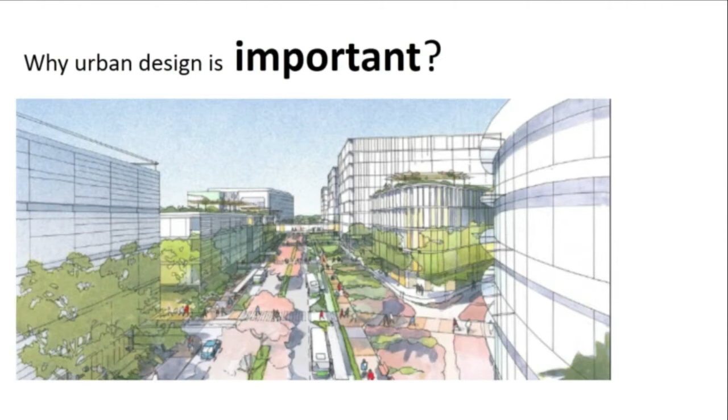Urban design addresses how people perceive and use their environment. It is all about how people care about the look, feel, and livability of their communities. It talks about the imageability of our neighborhoods.

So what are the elements we are looking for when doing urban planning or urban design? It comprises zoning, housing, public buildings, and recreation zones, whether it's parks, playgrounds, etc., along with different types of road systems and transport facilities covering all modes of transport.

How are we going to read the urban neighborhood? There are four methodologies of reading an urban neighborhood. Any study area, any urban neighborhood, can be read with all these four parameters.

First you have to identify. Identify what? Identify your urban neighborhood's name. It starts with the name, so you have to check for the name, because that particular name has been given to that particular neighborhood for a reason. It has some history, some origin, some valuable insight to it. You are looking for that.

Then you have to see the place of your neighborhood, the topographical pattern or the geographical connections it has. And you are looking for the significance - political significance, architectural significance, or socio-economic significance. For example, if you take up Chennai, during the British period Chennai became famous for the Indo-Saracenic architecture.

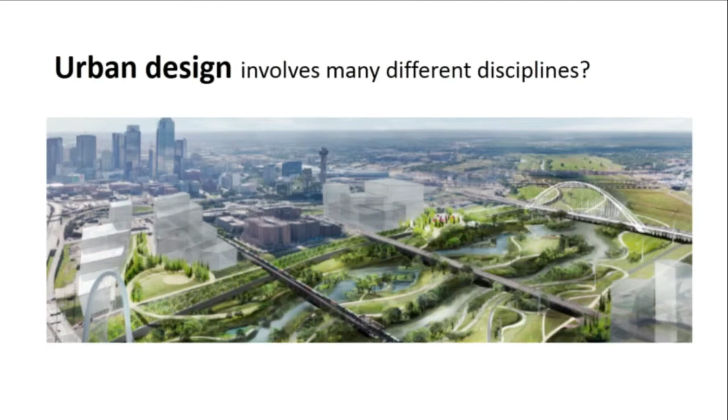Urban design operates at three different scales: at the regional level, at the neighborhood level, and at the block level. So from the larger scale to the smaller one. Further, urban design includes infrastructure, architecture, and public spaces.

So reading the urban environment from the urban perspective, there are so many theories, so many ways of reading the urban environment. Here I am going to quote two examples. The first one is about Jan Gehl. He is a Danish architect and urban designer who is a consultant in Copenhagen.

He is focused on improving the quality of urban life by reorienting city design towards the pedestrian and the cyclist. He is a founder of Gehl Architects, and he sees streets in a three-point perspective. He says that every street has three activities: necessary activity, optional activity, and social activities.

If you take a commercial street, say in Chennai or wherever, all the shops in the street, the activity happening in the shops, are necessary activities. The optional activities are the street hawkers or any additional activities on the streets. That becomes an optional activity.

Social activities are things that happen like when some festivals are happening, all of a sudden so many street stalls come up here and there. Or some political meetings suddenly create spaces. These types of activities are considered social activities. So from Gehl's perspective, we need to classify the streets with these three types of activities: necessary, optional, and social.

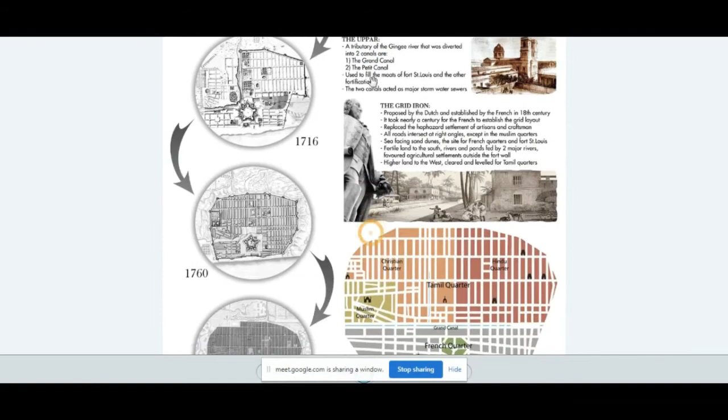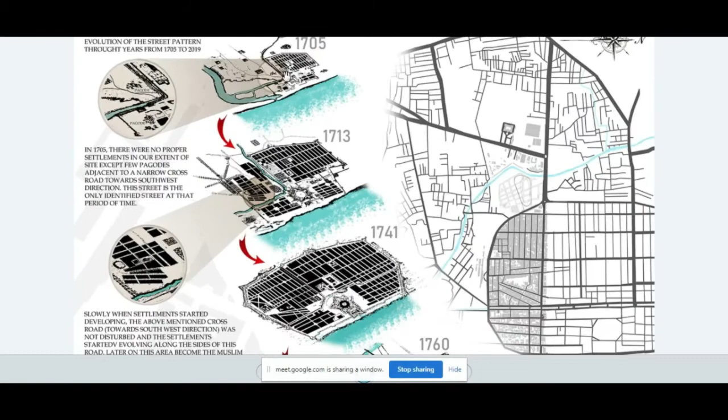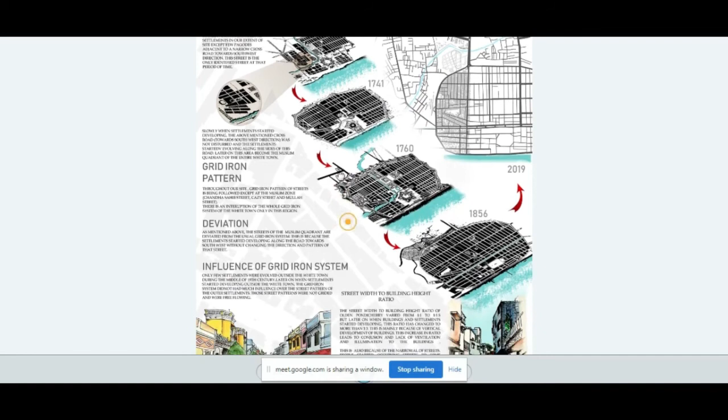We got a map from 1705. We have a canal, a large wide canal in 1705, and in 1713, due to rapid development, it gets reduced. Further in 1740 it is almost vanished, and we have a fort in 1741. In 1760 the canal is formed again, and in 1856 the fort gets demolished. These street analyses help you understand how the neighborhood developed over its timeline.

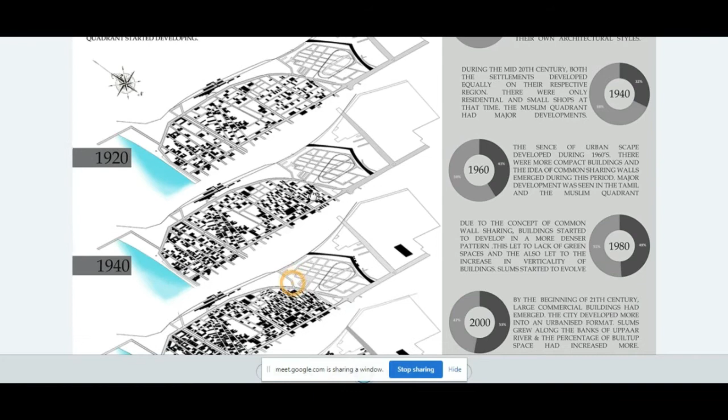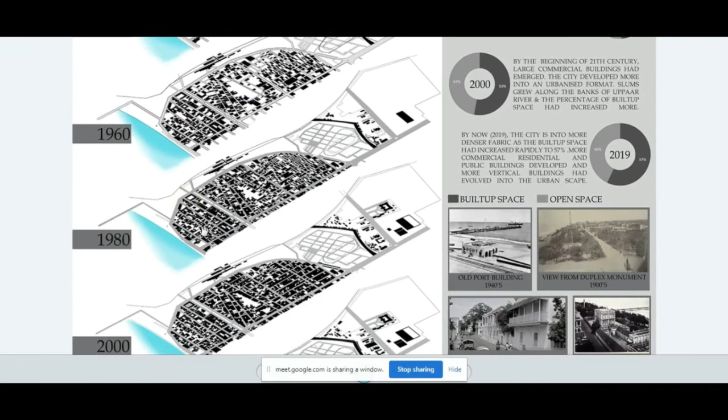The evolution of built forms - earlier we saw the evolution of networks, and here it is about the evolution of built form, how the buildings are developed. We got a map from 1920, and for every 20 years we have taken data - 1920, 1940, 1960, 2000, and by 2019 it is almost finished, with no spaces for further development.

This figure ground map analysis will help us easily understand the density within the neighborhood. For example, in the French town, you can see more open spaces. It is well placed, following World Health Organization norms, with more open spaces. Whereas in the Tamil town, you can see very less open spaces compared to the third ward above, with only a few open spaces. So it starts from sparse fabric to dense and very dense fabric. Figure ground helps to analyze the fabrics.

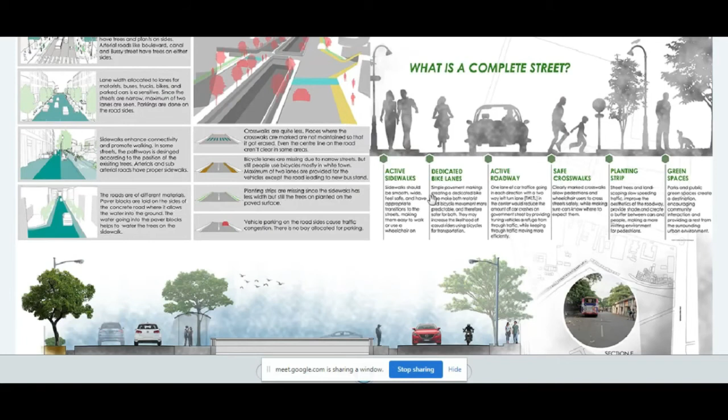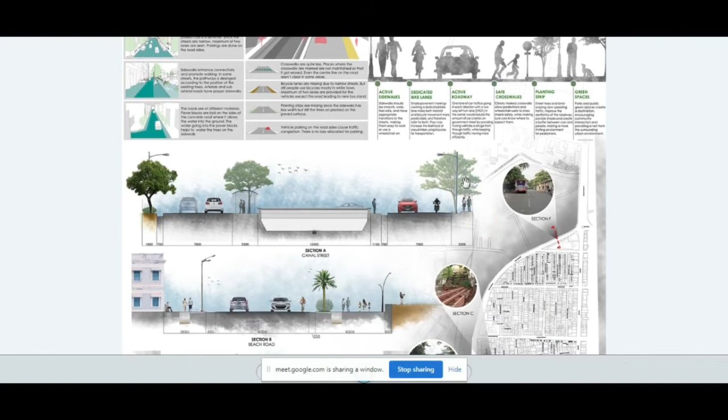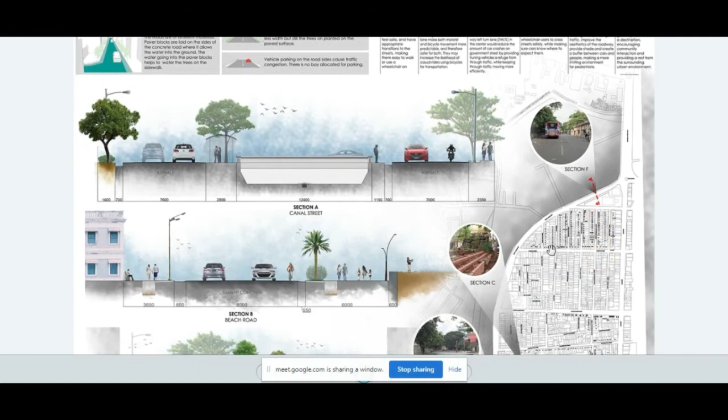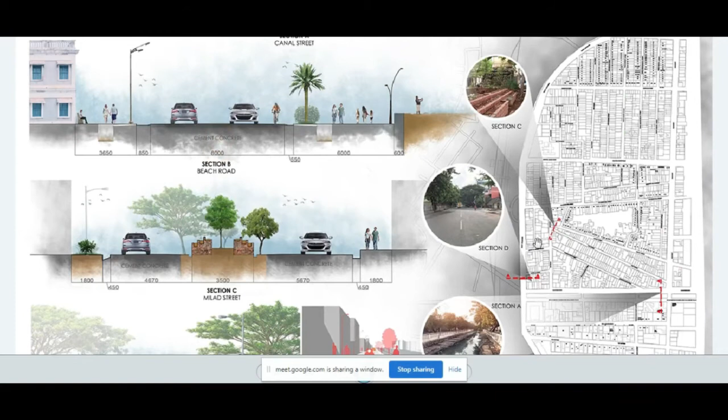Next, about the street sections. We discuss the active sidewalks and activities happening on them, whether sidewalks are given for particular streets or not, the dedicated bike lanes, the roadways, the crosswalks, and the plantings, as well as the green spaces. Each section has been taken, and the typical street section has been elaborated in detail. So this is how the street section is worked out.

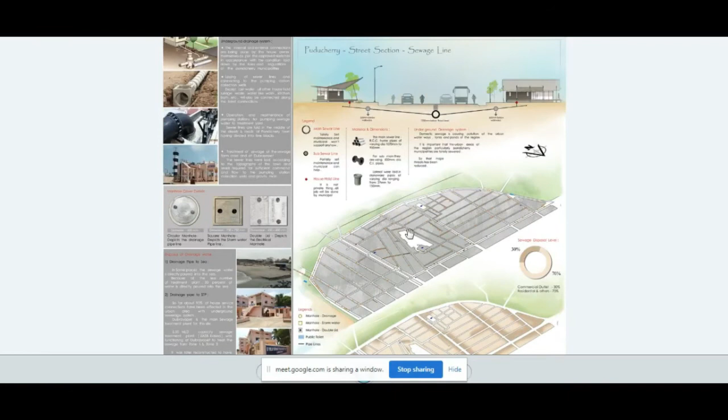Next, in infrastructure we have sewage management plants, and all the sewer is connected with the main sewer line as well as the sub sewer line and the household lines. This also talks about the underground drainage too.

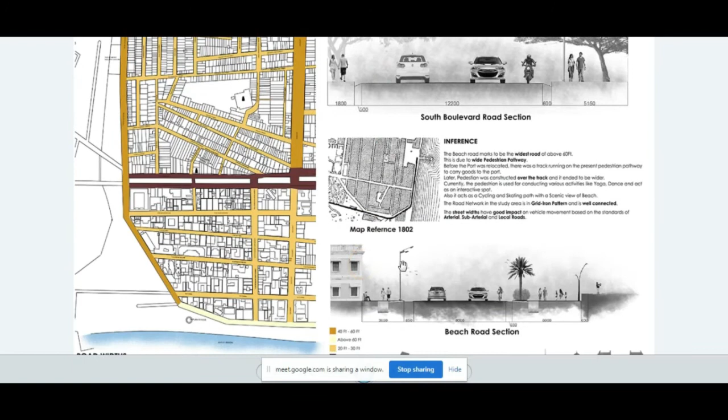Next we have the road network analysis. We highlight the arterial roads and sub-arterial roads and how they connect with the neighborhood, using color codes based on road widths, whether it's 40 feet or 30 feet, and we have drawn typical street sections too.

This is further about the road types based on materials. We have three types of materials in and around Pondicherry: asphalt, cement concrete, and concrete pavers for the arterial roads, subarterial roads, and local streets. These are highlighted here with the color codes shown.

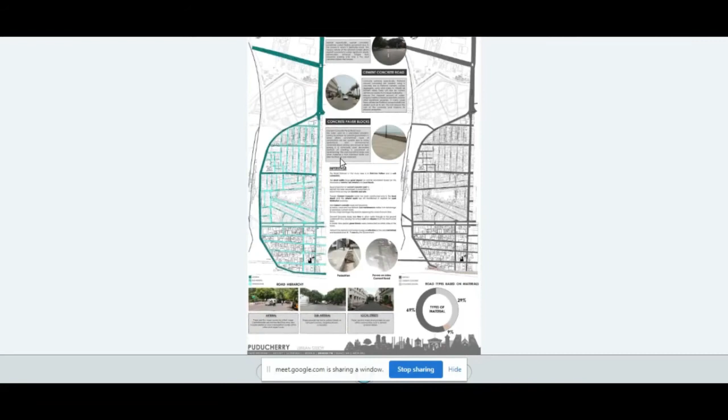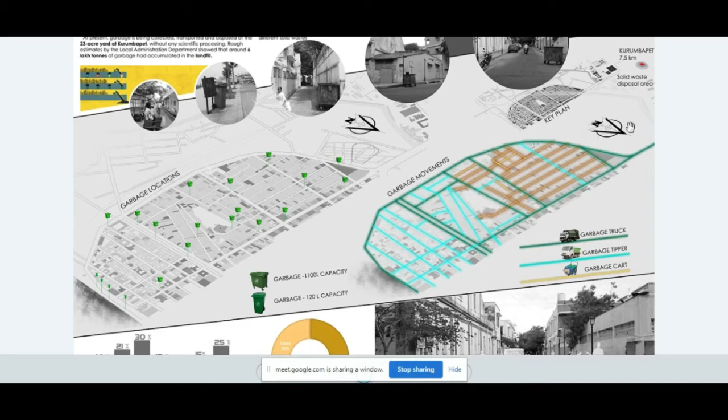And about solid waste management. All the solid waste is collected in three ways: sanitary waste collected separately, non-biodegradable waste separate, and organic waste taken out. They dump the waste from the city center to Kurumbapet, 7.5 kilometers from our neighborhood. This information will help you understand our neighborhood.

And now I will explain ecology.

And about urban vistas. Vistas have components of identity, structure, and meaning.

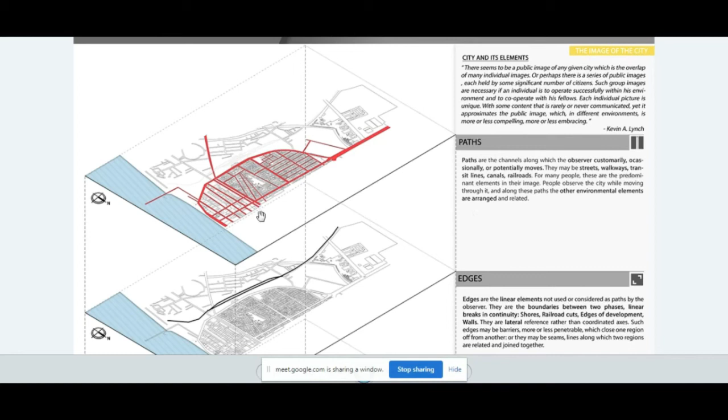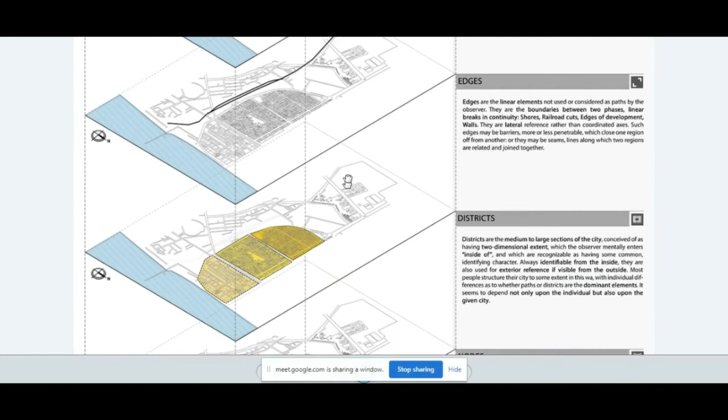The overall neighborhood has been explored with Kevin Lynch principles of paths. The street networks have been taken as paths, and the edges, the railway borders, will be considered as edges, as well as the sea line.

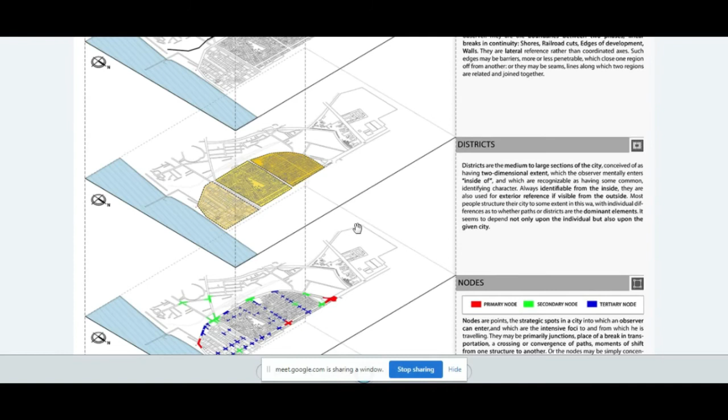And for the districts, as Kevin Lynch suggests, the French town is considered as a special district, the Tamil town is another, and the Muslim quarters as another district.

And for nodes, we have highlighted all the primary, secondary, and tertiary nodes.

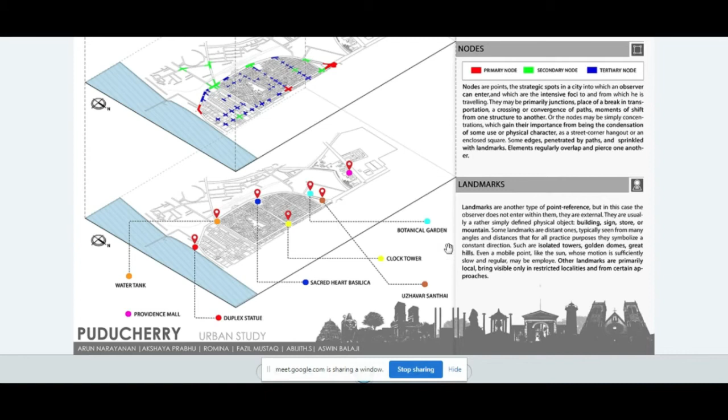And landmarks we have mentioned. As Kevin Lynch told, landmarks are in the people's mind. So it includes the water tank, the Providence Mall, the duplex statues, the Sacred Heart Basilica, the Uzhavar Santhai market, the clock tower, and botanical garden. These are marked as landmark buildings.

And further, the analysis of nodes and landmarks. The importance of the nodes with these landmarks have been elaborated in detail about when it happened, when it was executed. So these details we have added.

And we dealt with the urban sensescapes, all the five scapes like viewscapes, taste, smell, sound, and touch.

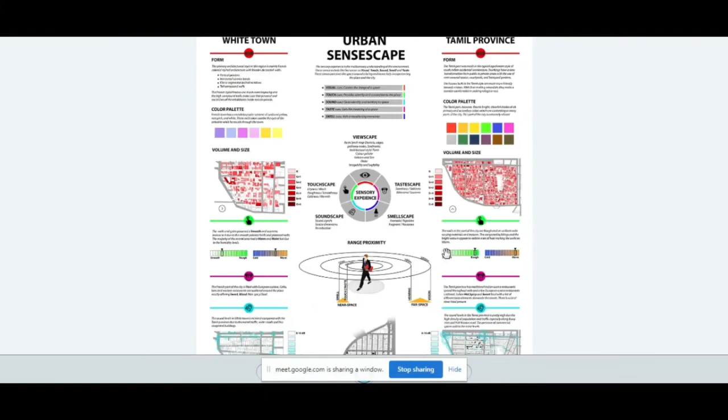And one of the major things in urban vistas is dealing with the design elements. So we have detailed out the elements, whether in the residential elements or the public building elements. We have detailed it out, and even the street lamps also we have taken.

And we have analyzed the visual pollutions, sources of visual pollutions, the urban pockets where visual pollutions are analyzed.

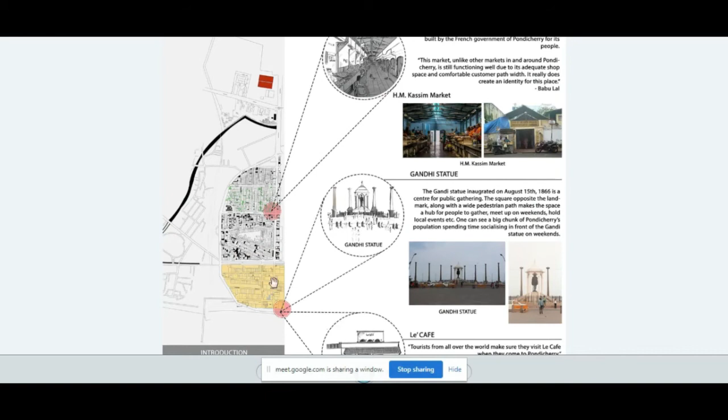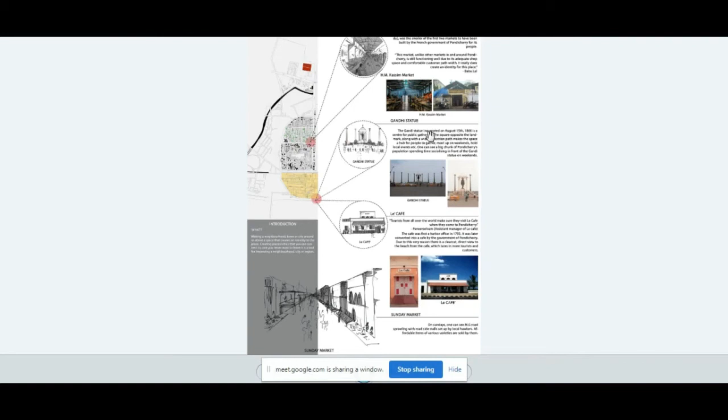And finally, we deal with the placemaking. We deal with the placemaking elements within our urban neighborhoods. So we found three things: one is H.M. Kassim Market in the Muslim quarters, Gandhi statue along the beach road, and Le Cafe in the beach road. So we have identified the placemaking elements in our area.

So this is all about the case studies of Pondicherry. Now I will get into the case study of Copenhagen.

In the COVID time, the challenges are there, so the physical visit to the neighborhood is not possible. So we plan to take up a study in a developed country, a developed city. We plan to take up Copenhagen from Denmark. In Copenhagen, we have taken the district called Indre By.

So the possibility of studying urban study online is about the data. Since it is a developed city, we got all the data from the internet itself. We have used Google here for getting the road networks and traffic analysis, and we use old history map websites for the history map and other things. And we have an official Copenhagen website where you will get all the socio-economic data, the population data, and the climatic analysis data.

So our role in this is getting all the data. Our role is to interpret the data and analyze the data. I hope we have done that.

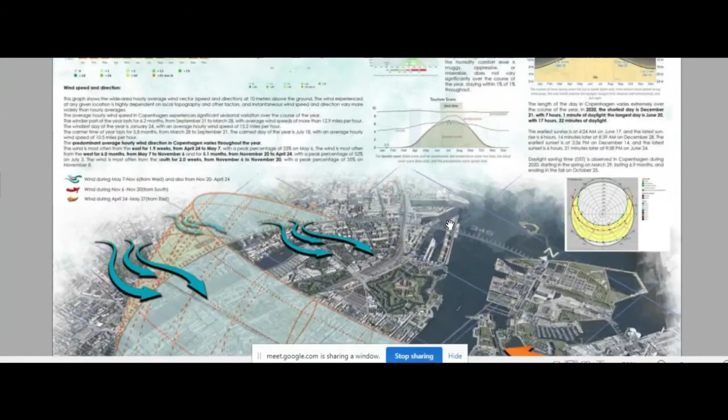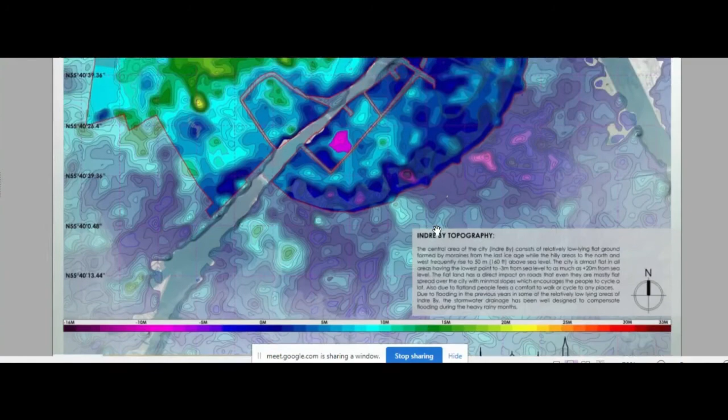The base map also shows the built-up areas and the footprints of the buildings. Further, we go on to the climatology aspects, dealing with topography, wind directions, and contours. These contours are taken from Google Earth, and we study them.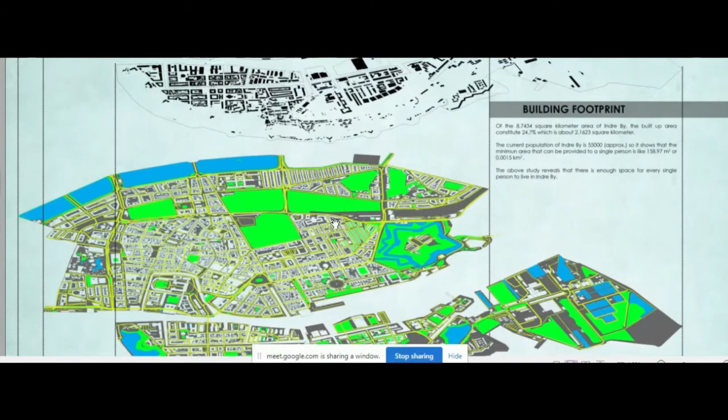With the figure ground map analysis, we can see how we have large open spaces within the Indre By region. It was found that 24.7% of the land cover is covered out of the whole Indre By area. This map shows the open spaces and subdivisions.

It highlights the blue infrastructure as well as the green infrastructures.

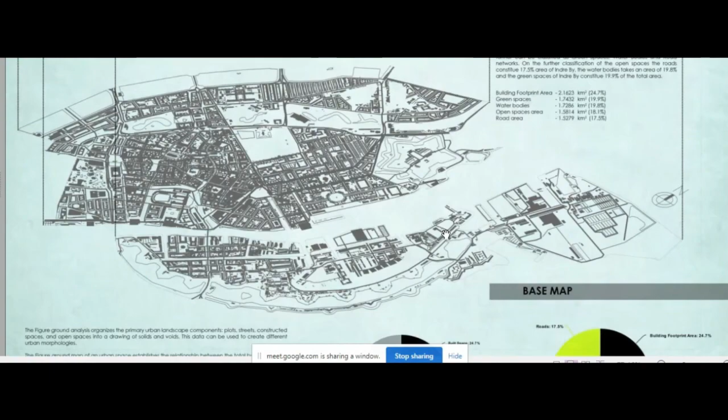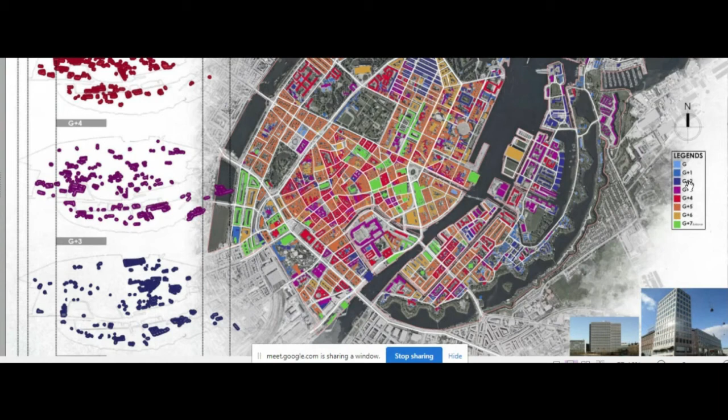For the building height map, similar to Pondicherry, we have mentioned ground floor buildings up to G+7 with color codes. With the help of these color codes, we can easily identify where it is most dense.

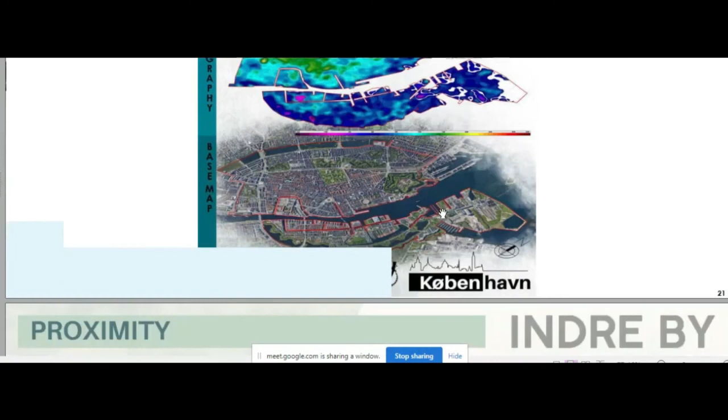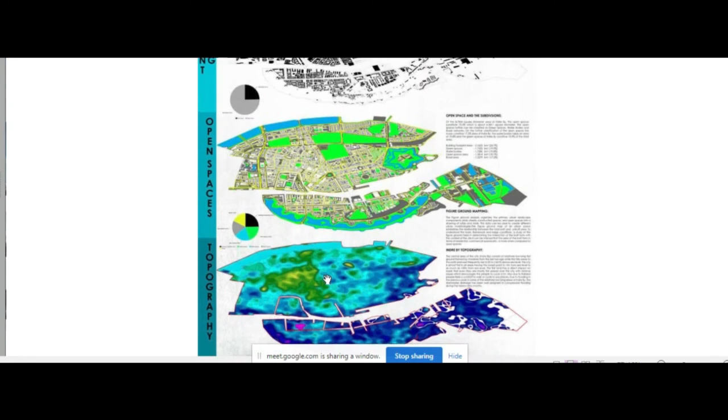Further, we have layered map analysis where we keep the base map, and over the base map we place the topography to check how topography plays a role in the development. Over that we have open spaces, footprints of the buildings, and road network analysis. Above that, land use maps, height maps, and finally the 3D models. This layered map analysis helps to analyze everything in one place.

Further, we do proximity analysis - how well our neighborhood is connected with surroundings like parks, canals, museums, universities, churches, ferries, metro stations and tram stations.

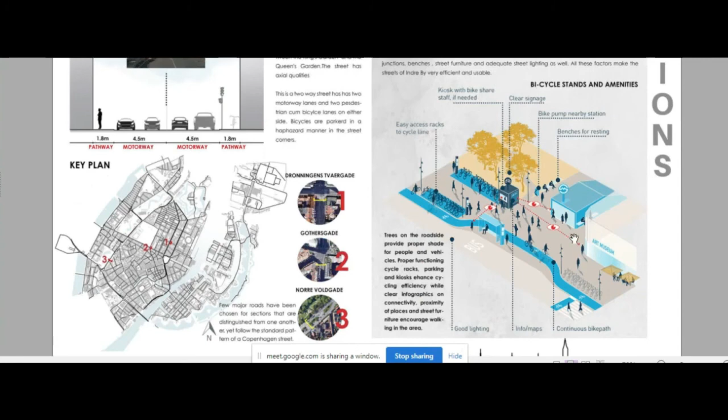Further, we have street sections - we took up important streets and did a section analysis for them.

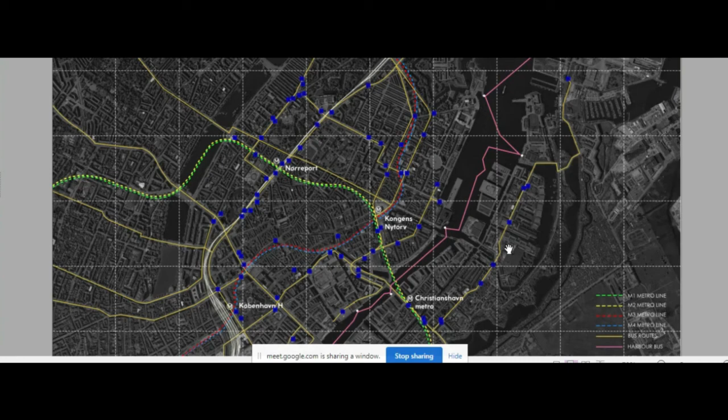We also deal with public transport. In Copenhagen, they have 4 metro lines running in and around the city - M1, M2, M3, M4 - and they have bus routes and harbour buses too, which have been highlighted, and the network of those will be analyzed.

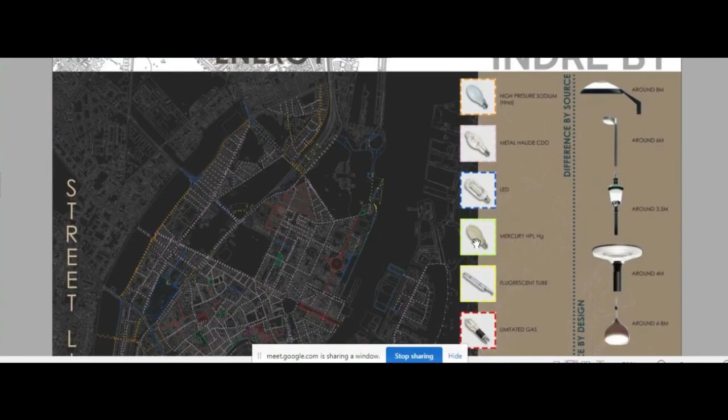In Copenhagen, they have exclusive bridges for the cycle. So in 1975, they are into cycle, whereas in India, in 1975, we are into automobile sector. So these are the changes happening.

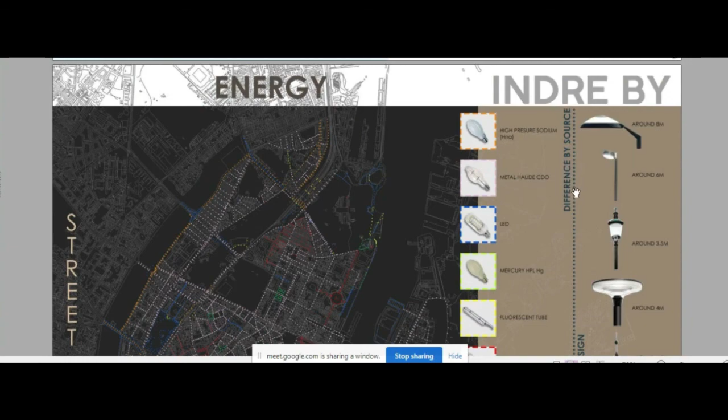And this one talks about the energy measures they have taken. So they are using the high pressure sodium lamp for the highways as well as metal halide, LEDs, mercury, fluorescent tubes and all. So with the help of these legends, we have highlighted those lights in our urban neighborhood so that we can read out where and why they are placed.

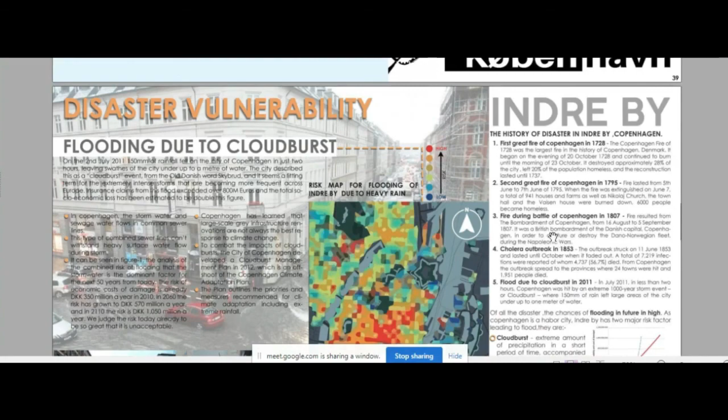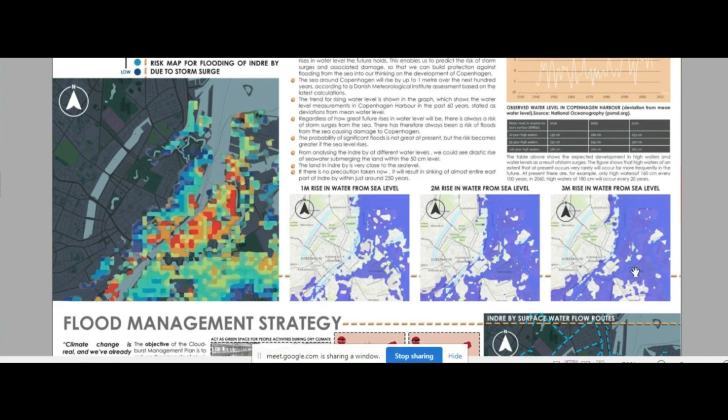So disaster vulnerability - what will happen if the sea rises by 1 meter, 2 meters, or 3 meters? These analyses can be taken from the Copenhagen websites. And the flood management strategies they are following.

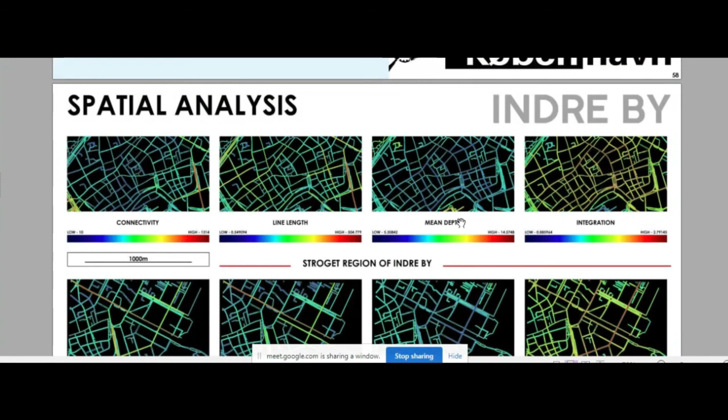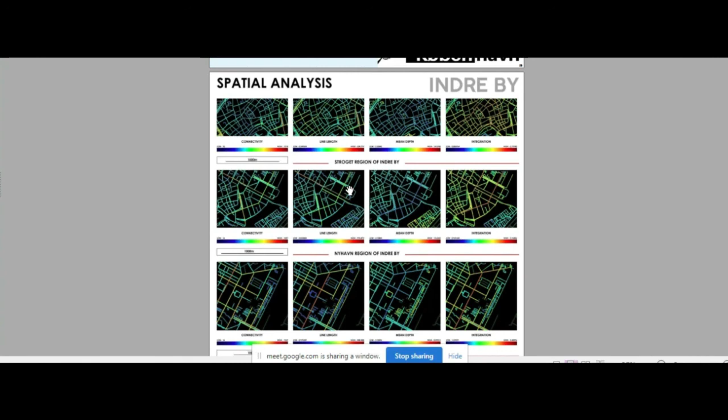And finally, about the PEST analysis - political, economical, social, and technology data, and SWOT analysis. More interesting in this, we have added space syntax, spatial analysis with the help of space syntax software here. So space syntax software is the one which helps to analyze the spatial relationship. You can identify the connections and integrations within the urban neighborhood. So that we have done.